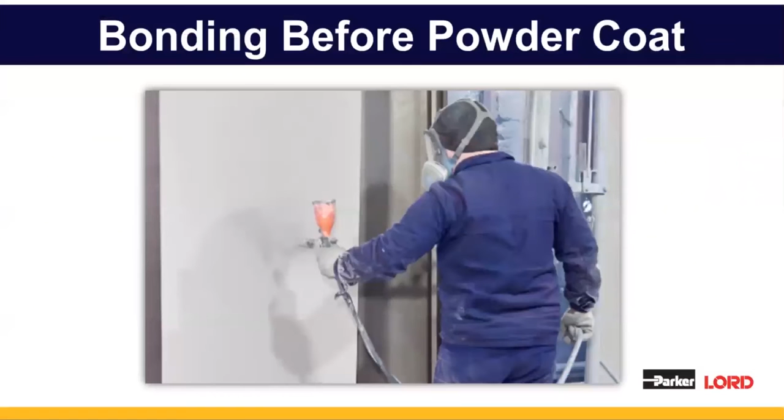Let's get started with the harder of the two applications, which is bonding before the powder coat process. These are the general instructions to follow to ensure that you have a good bond before your parts go through the oven. The most important step, the one we'll spend most of our time on, is step 3, which is fixturing and building handling strength.

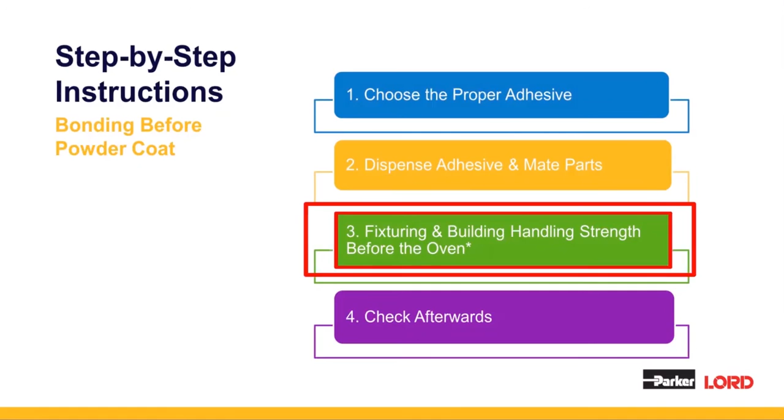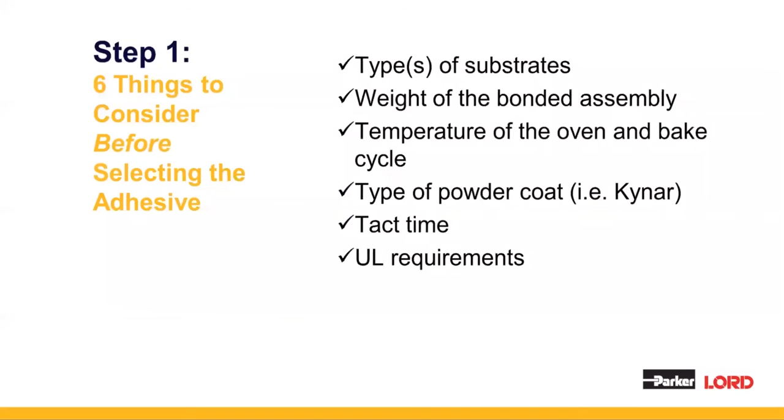Before you select your adhesive, there are a few things to consider: the materials you're bonding, the final weight of the bonded assembly, and the details of your bake process will all determine which adhesive you should be looking at. Other things to consider are your desired tact time as well as your UL requirements. Be sure when you bring your applications to us that you keep this list handy and refer back to each of these points with your answers ready so we can help you select the proper adhesive.

Now, these are the adhesives you would ideally choose from when bonding before powder coat. We have essentially four different options of adhesives that can go through a powder coat bake process. They all have temperature resistance of up to 400 degrees Fahrenheit, or 204 degrees C, for up to 90 minutes, so you don't have to worry about the bond line degrading as it goes through the oven.

Another great advantage of LORD acrylics is they will come out of the oven stronger than they would just curing at room temperature, a unique property of our technology. You can see in the slides we have a tensile strength rating as well as a tensile strength with post-bake, showing the difference in tensile strength both before and after it goes through the powder coat. That's a unique property of LORD technology.

Maxlok is by far our top performing adhesive for bonding before powder coat. It has superior temperature resistance, and the tensile strength relative to our other acrylic adhesives is also superior, as you can see in the slides.

You'll want to make sure you use this adhesive if you have large or heavy parts, and if you're using metals such as galvanneal, galvanized, or anything with zinc in it. You'll also want to consider Maxlok if your oven temperatures are 350 degrees or higher and you have longer bake cycles, since it has superior temperature resistance, making it ideal for those hotter and longer bake cycles.

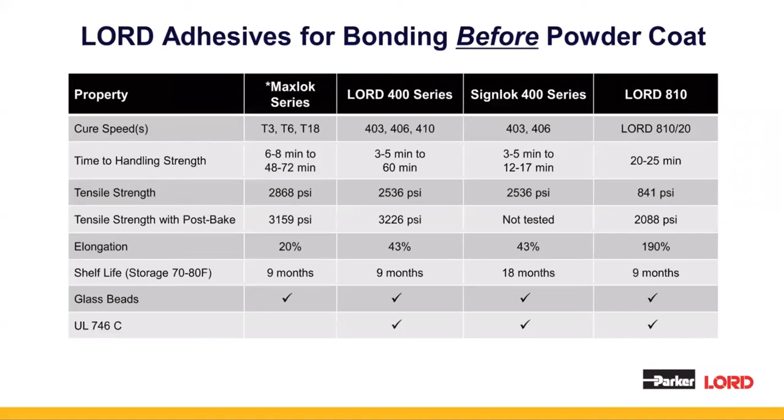The last product we'll talk about is the LORD 810. This is a highly flexible metal bonding adhesive designed to eliminate read-through, or the appearance of the adhesive showing up on the back side of, say, a thin gauge panel. We recommend this product for thin gauge substrates and/or for Kynar bake process cycles.

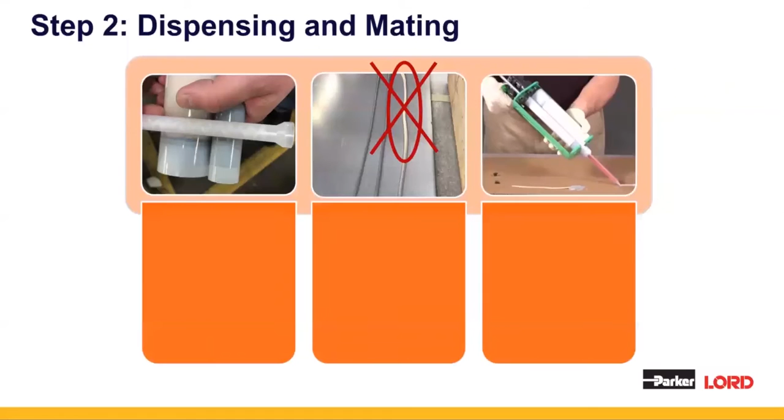Step 2 will determine if you're setting yourself up for success or for failure. More often than not, the plungers of your cartridge are not level. As you can see in the picture to the left, this is just a visual showing that the plungers on either side of the cartridge are actually not level, because we fill each side separately at our plant, so they're not always exactly even.

The first step in setting up your adhesive is leveling your plungers, which you do by dispensing some of the material without the mix tip on until you see both sides coming out evenly. This will really ensure the product is on ratio, because if it's not, the adhesive won't cure properly and could result in poor adhesion. You can see this before the parts even go through the oven.

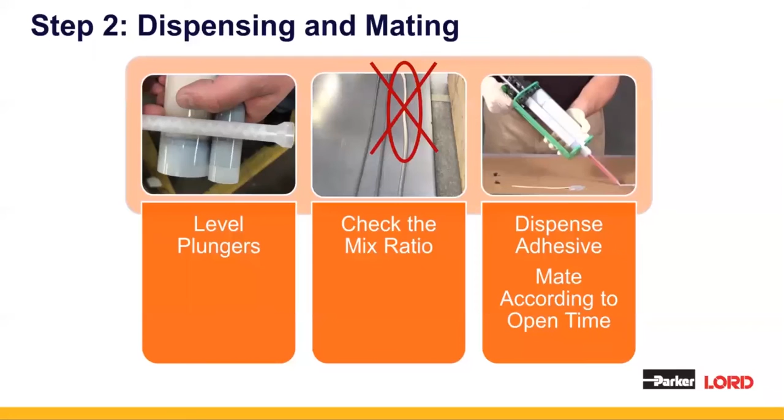Once your parts are mated, it's important that they don't come apart. If the bond line separates and becomes remated, you can actually entrap air. And air entrapment will certainly cause failures, sometimes as quickly as coming straight out of the oven.

In this slide, there's a picture of what air entrapment looks like. You can see splatter marks on top of the squeezed out bead of adhesive, and this is something you don't want to see. This means that air has been trapped in and the panel has sprung up and squeezed back down. What you want to see is actually just a smooth, even layer of adhesive.

If you do see this air entrapment, what you're going to have to do is completely start from scratch. That means taking apart your parts, cleaning off the adhesive, and beginning the bonding and assembly process all over again.

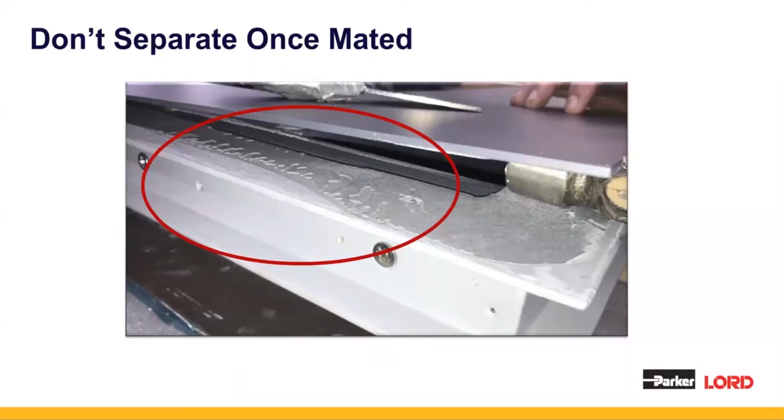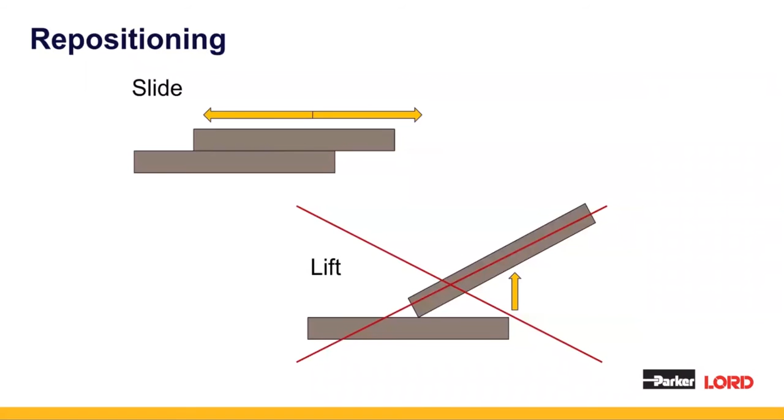Now, if you need to reposition your parts, it's best to do this by sliding, not by lifting. Lord acrylic adhesives are equipped with glass beads, which help enable sliding for repositioning. But if the parts do come apart, or if you simply need to rework the assembly, just scrape off the adhesive, clean with an alcohol wipe, and then start the process again.

Once you have your parts laid out the way you want them, it's time for clamping, or fixturing, as we call step 3. Your parts should be weighted with even pressure until handling strength is reached. You also want to follow one of the two recommended paths for proper clamping.

You can do this either by starting on one end and working your way down, or you can start in the middle and work your way out, making sure you maintain about a 4-inch spacing between each clamp. The path you choose will depend on the size and shape of your parts, but this is really your preference. What you don't want to do is start on either end and then work your way towards the middle.

This could cause the part to bow slightly in areas between the clamps, resulting in poor adhesion in some areas and even stress concentration in other areas. Air also becomes entrapped when your parts bow.

It's important to know that handling strength will vary depending on the size and weight of your parts. The heavier and bigger the part is, the more handling strength you'll need. A great place to start is our handling time rating in our tech data sheets, which you can download off our website, lord.com.

Now, clamps are just one option for fixturing. There are multiple things you can do to make sure your parts don't come apart in the oven. You could use more permanent methods like rivets or spot welding. You can also use weights, which are also an option. But if you prefer to clamp, C-clamps, vice grips, and flat end clamps all do a really great job.

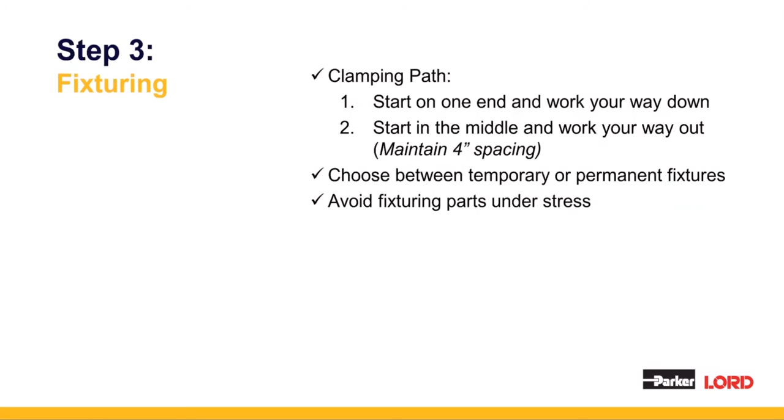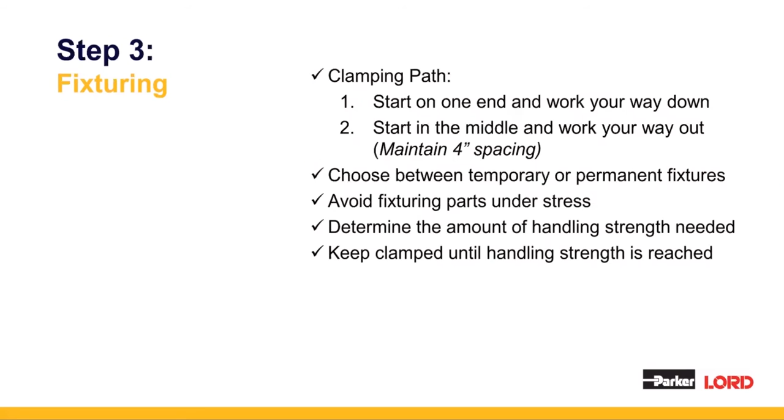For example, if parts are formed and they're pressing away from the substrate you want to mate to, you're going to be bonding stress into that, and it's going to want to already come apart. As the adhesive and the bonded assembly goes through the oven, the adhesive will soften slightly when introduced to that heat, and that softening will lower the strength of the adhesive, so the part is likely going to come apart. Make sure that if you do have formed parts, try to get them as flat and smooth as possible before bonding them so they don't come apart in the oven.

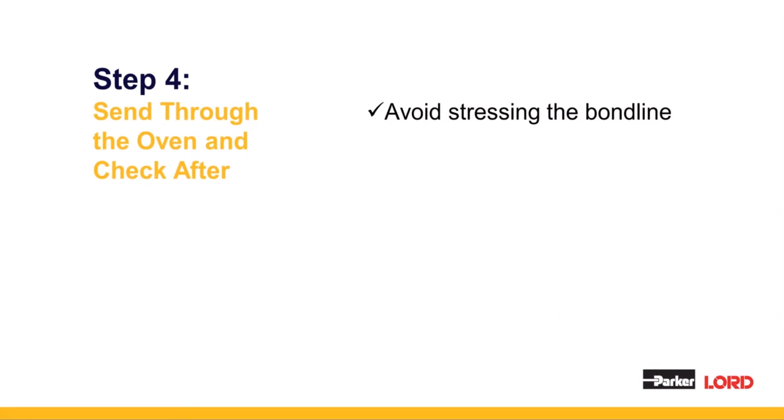Now that your parts are properly fixtured, it's time to go through the oven. Avoid hanging parts such that you're putting the bond line in shear stress or peel stress, and try to use rolling racks or jigs for particularly large and heavy parts.

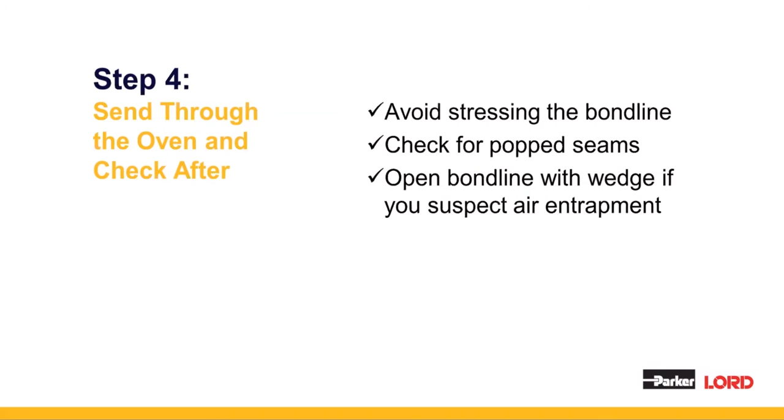After the parts come out of the oven, make sure to check your joints for any popped areas or seams. If you suspect there was air entrapment, grab a wedge and jam it into the bond line. Put the bond line into peel and break it apart, so you can see what's in between. We recommend this technique only on test parts, as these will likely need to be scrapped afterward. If air does become entrapped, it's best to catch it before the parts go through the oven so you can restart your bonding process without scrapping parts.

We've gone through the bonding process before powder coat. Now let's go through bonding after your parts have already been painted. This process applies not just to powder coat paint, but to any substrate that's been primed or painted.

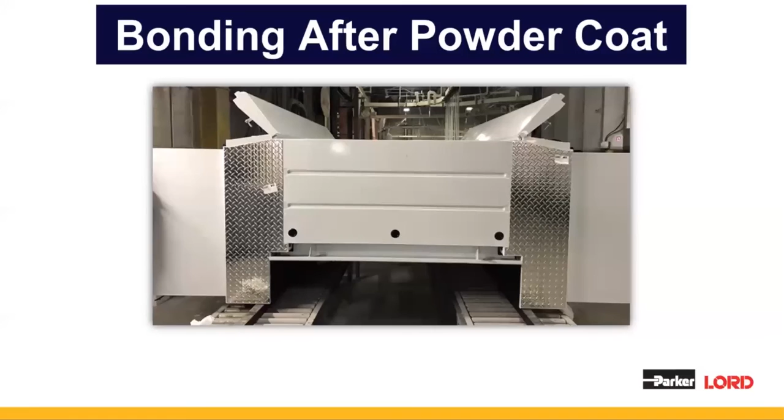Here are the general guidelines to follow for bonding after you go through a powder coat process, or bonding right to paint. As you can see, it is fairly similar, especially when you get to mating and fixturing, to the bonding before powder coat process.

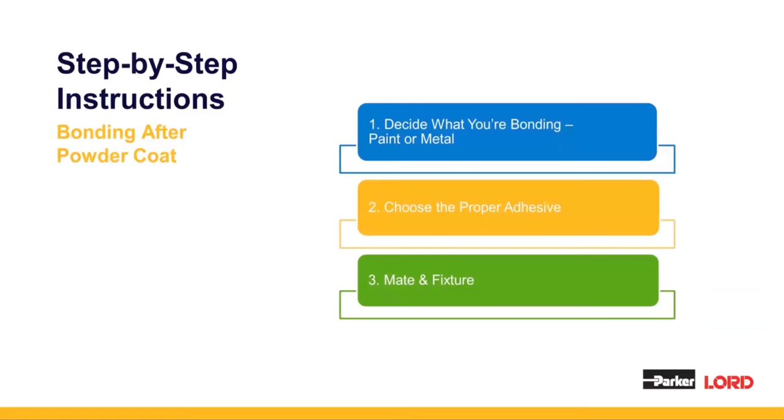The primary difference comparing bonding after versus bonding before is when you bond after, you really have to decide first whether you want to bond to the metal or bond to the paint. Bonding to bare metal is really our preferred option because your bond strength is more predictable and often more reliable than bonding to the paint.

When you bond to paint, the strength of the assembly is only as strong as your paint. But I don't want that to scare you. We have been bonding to paint for many years and have thousands of applications and cases that have bonded to paint successfully. So it is doable—you still can do it.

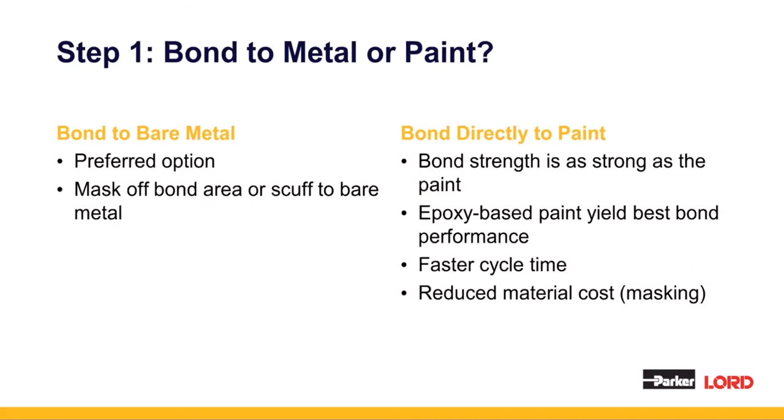The benefit of bonding right to the paint is you get a faster cycle time and reduced material costs, mostly related to the prepping of the adhesive. You don't have to worry about the extra cost of masking tape, and you save yourself time in the prep by just bonding right to the paint.

For bonding to powder coat, these are your four options. You have Maxlok and 400 series, which from earlier slides you saw can be used for bonding before powder coat. These are also great options for bonding right to paint. The other great benefit of these two products is you can cross-bond painted substrates to bare metal as well, which is the example in the picture we opened with for bonding to powder coat.

So these are two great options you can use and keep in-house for bonding both before and after powder coat. The next two recommended products are 7542 and 7545.

These are urethane-based adhesives and they grip very, very well into paint. More often than not, these are our first recommendations for bonding to powder coat paint or primed and painted metals. The big difference between the two is the 7542 has UL 746C approval, and it has a lower viscosity, which makes it great for going into tighter tolerances.

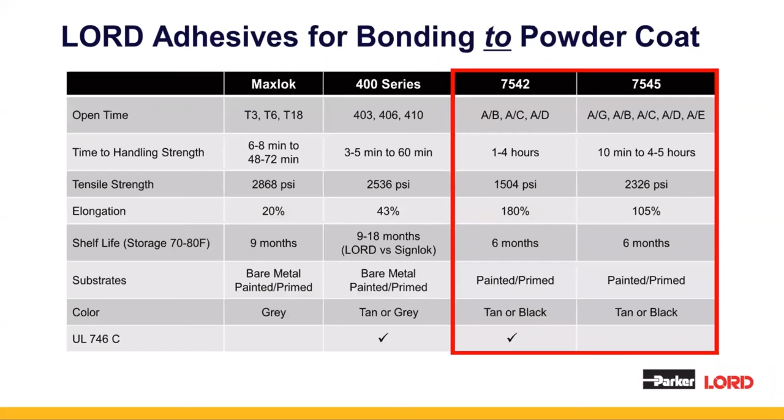The 7545 is more of a paste consistency. It has a lot higher viscosity.

Once your parts are prepped, mate and fixture your parts using the same guide as for bonding prior to powder coat, ensuring you understand the handling strength you need and are clamping your parts long enough to reach the required handling strength. If you do decide to scuff, make sure you scuff all the way down to the bare metal and follow with an alcohol wipe. Then mate and fixture as usual.